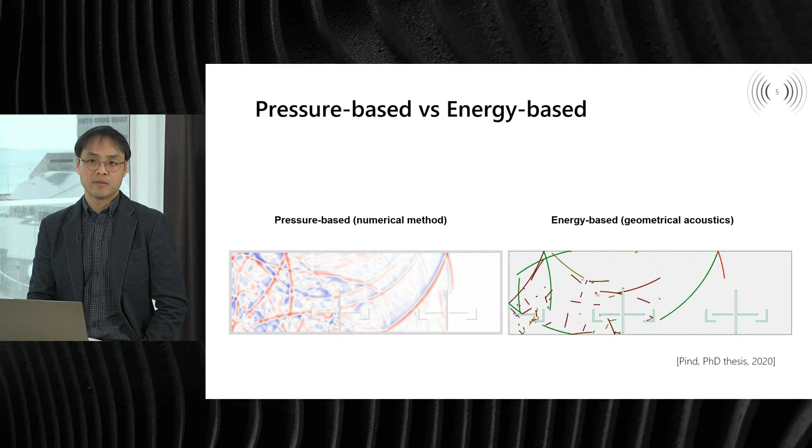I want to talk about pressure-based and energy-based simulation in this talk. Basically, pressure-based simulations are predicting sound pressures, and many of the numerical methods, all the wave-based simulations, are pressure-based — we calculate the pressures. On the other hand, many geometrical acoustics techniques are energy-based.

Of course, there are some pressure-based geometrical acoustics techniques. On the left you see the sound propagation from a source, and there are two different colors, red and blue. Red means sound pressure is positive, and blue means sound pressure is negative. So we have kind of phase information in this kind of pressure-based simulation, and the sound is all over at any time.

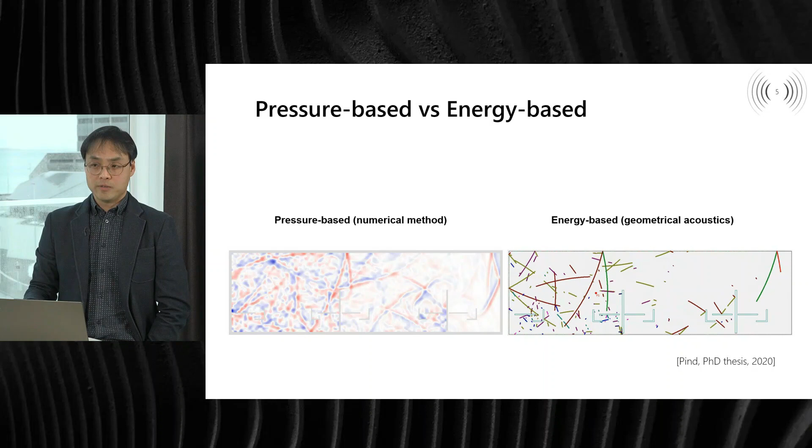If you look at the picture of the energy-based simulation, we have an approximate wavefront, but the wavefront is not continuous — it's a very discontinuous wavefront and sound field, and we don't have phase information in this kind of simulation. So what is lacking in energy-based simulation are diffraction and interference. I will go into those things a little later.

Geometrical acoustics has really many good features. I mean, it's really fast, and it actually calculates the angle of incidence, and it also visualizes the sound path very nicely with straight rays, as in this picture.

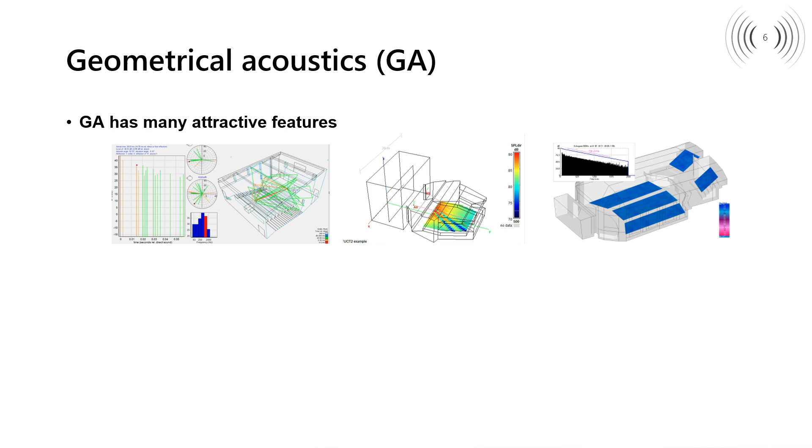But it is only the particle property of sound. As Einstein mentioned, we have two contradictory pictures of reality. Separately, neither of them fully explain the phenomena, but together they do. So we want to combine the wave nature and the particle property of sound in acoustic simulation, because they complement each other.

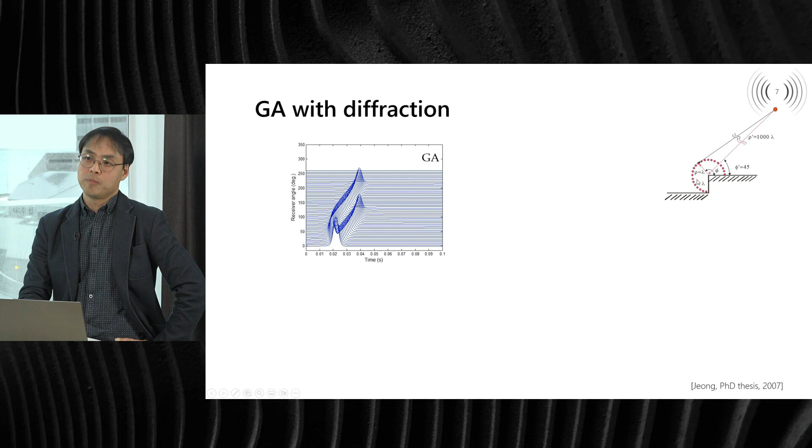So, diffraction. This is a very simple setup, a geometrical acoustic simulation. We have a sound source far away from this structure, and these are the receiver positions, at different angles. From this angle to this angle, we have direct sound and reflections.

You could actually see two different pulses: this one indicating direct sound, these are reflections. From this angle to somewhere here, you have only the direct sound. And above this angle, there's no sound using geometrical acoustics.

So we have a very discontinuous sound field, indicating the impulse response from all the angles. By adding single diffraction and double diffraction, and summing geometrical acoustics with those two diffraction components, we make the sound field very smooth and continuous. This is the true picture, more realistic in our life.

So there is a way to add the diffraction component into the geometrical acoustic simulation. There's actually a better way: when we numerically solve the wave equation, we inherently have diffraction in the solution.

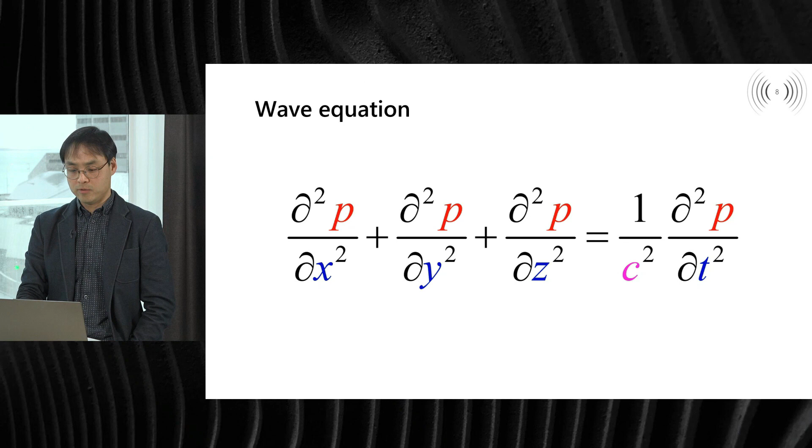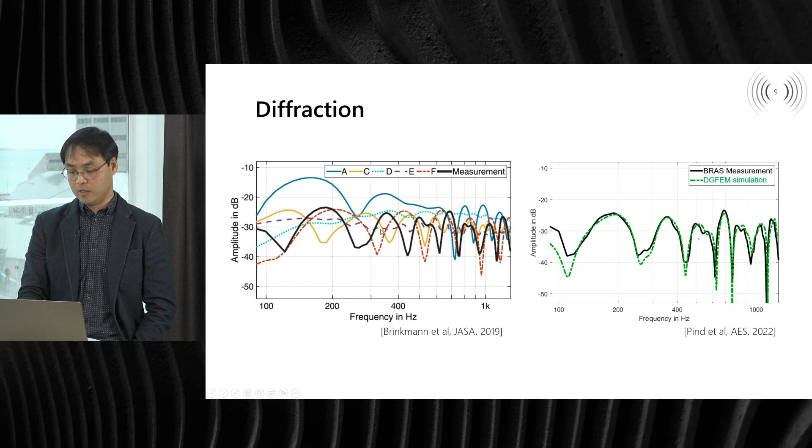Those German researchers from TU Berlin and TU Aachen also made a round-robin test, comparing commercial geometrical acoustic simulations A, C, D, E, F against the measurement. Those geometrical acoustic simulations struggle to match the measurement because they are energy-based simulations.

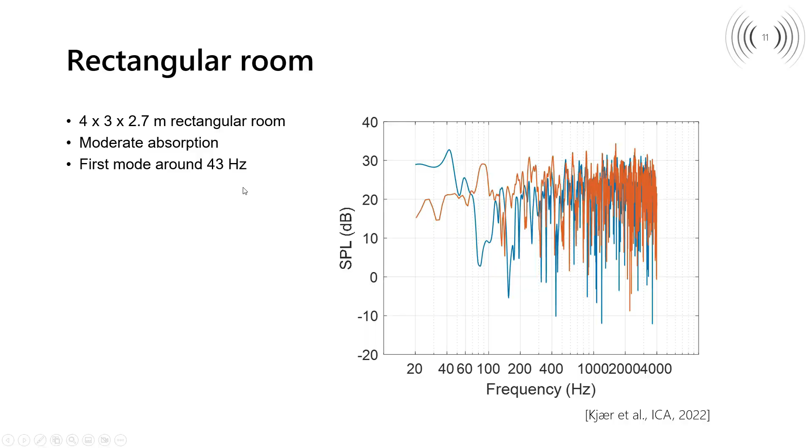We made a comparison between two different simulations: one pressure-based, the other geometrical acoustic. This is a rectangular room with dimensions of 4 by 3 by 2.7 meters. The first room mode must appear around 43 Hertz. In one simulation, you could see that peak; in the other simulation, you cannot really see any peaks around 43 Hertz.

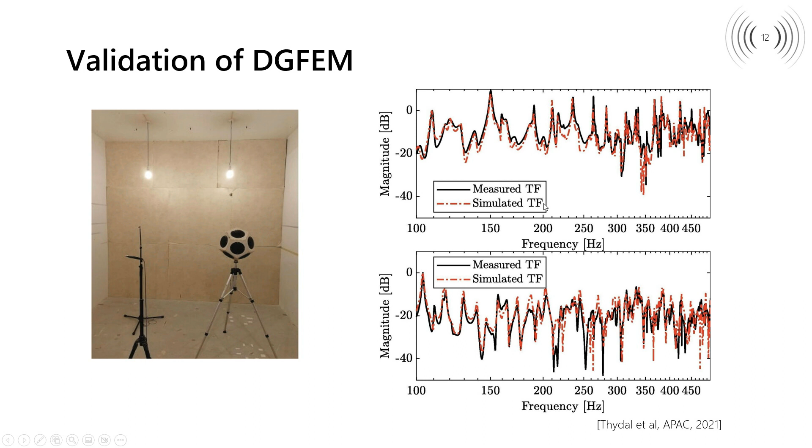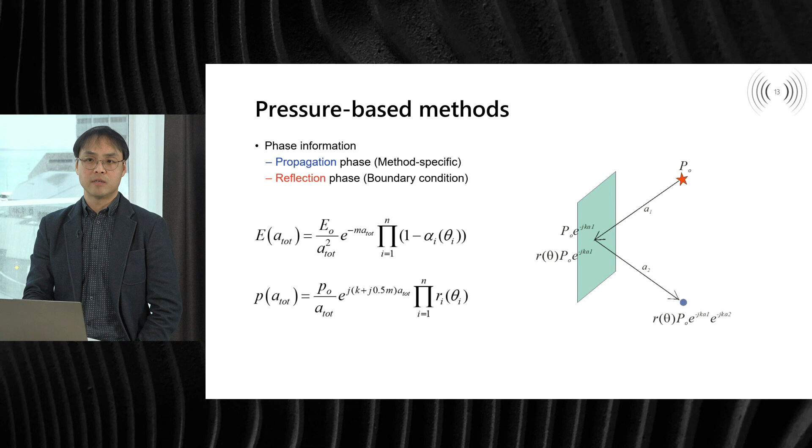As sound propagates, we have phase information, and some methods can take this into account, for example numerical simulations or wave-based simulations. The second phase information is reflection phase: we have a phase shift on the boundary upon reflection. If we inject a nice phased boundary condition, we could take reflection phase into the simulation.

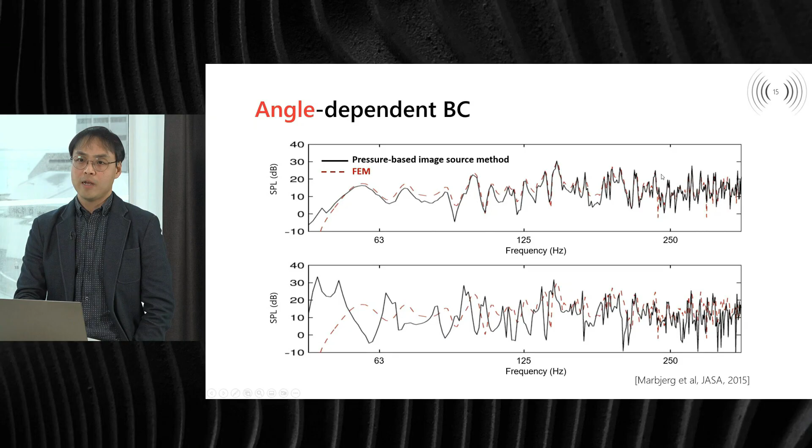Let's move on to the boundary condition. In this slide I'm showing two graphs. The black line is the pressure-based image source method, and the red dotted line is the finite element simulation, which is basically the same in both graphs. So what makes the pressure-based image source method so different between the two? That's the boundary condition—we used different boundary conditions.

On the top one, we use the angle-dependent, complex-valued pressure reflection coefficient, which has angular dependency and phase information inside. When we use random incidence absorption coefficient—an angle-averaged absorption coefficient—it doesn't have any angular dependency or phase information. That actually messed up the simulation quite a bit.

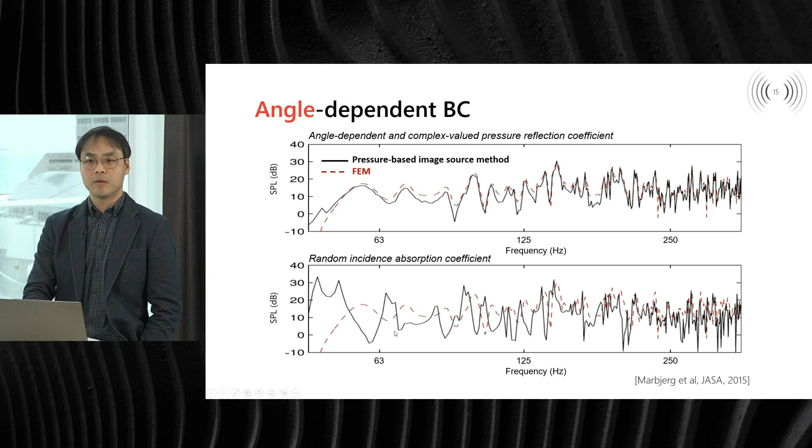So more precise input data is always good, of course. Let's move on to this more difficult topic, extended reacting boundary condition. Extended reacting effectively means that the surface impedance changes with the angle of incidence.

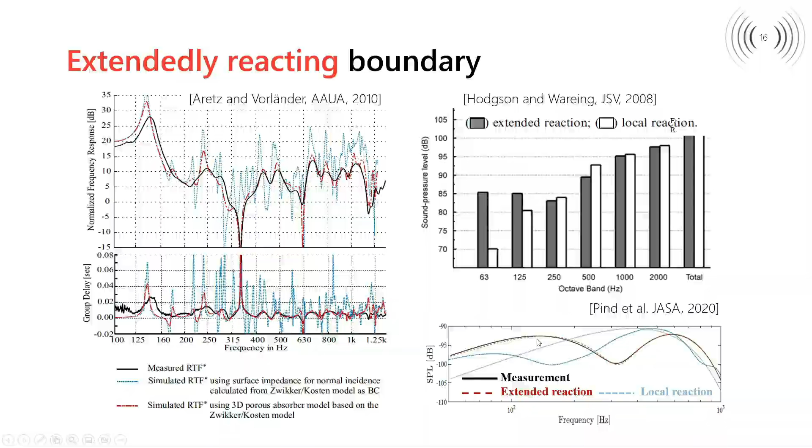So my message is we have to use pressure-based methods and more precise boundary conditions—whether pressure-based reflection coefficient, surface impedance, or angle-dependent complex reflection coefficient. Then we can include all the phase information in the simulation. In contrast, energy-based simulation with a less precise boundary condition, like the sound absorption coefficient, has no phase information.

This is actually one of the conclusions from the round-robin test paper in JASA: most geometrical acoustics methods generate obvious modeling errors, due to the simplified use of random incidence absorption coefficient and scattering coefficient. So the quality of the boundary condition really matters, and these geometrical acoustic simulations are missing or insufficiently modeling diffraction since it's simply energy-based simulation. It's very clear we have to use more pressure-based methods and good boundary conditions.

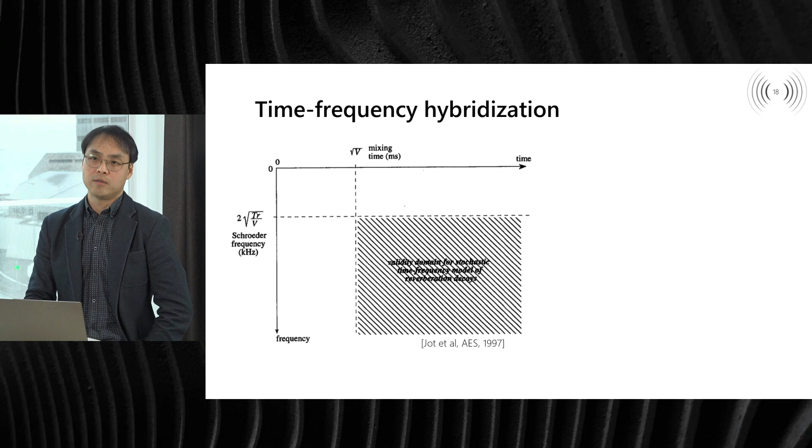Let's talk briefly about hybridization. We have tons of simulation tools, so why not hybridize the simulation in time and frequency? This plot shows the valid range for a stochastic time-frequency model of reverberation decay above the mixing time, above the Schroeder frequency—which is one of the transition frequencies from low frequency to high frequency.

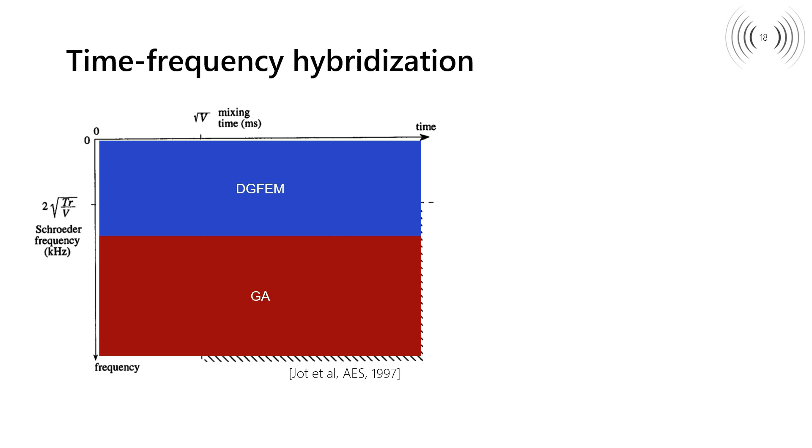So it's pretty wise to combine numerical wave-based simulation like DGFEM at low frequencies and use geometrical acoustics at high frequencies, since geometrical acoustics is much faster than DGFEM. Actually, Treble combined the pressure-based ISM in the geometrical acoustic part, extending the accuracy somewhat. But it's always a compromise.

If you really want a fast simulation, the geometrical acoustics part must be bigger than the DGFEM part. If you really push for accuracy, then DGFEM could be used up to 2 kHz, 4 kHz, very high frequencies.

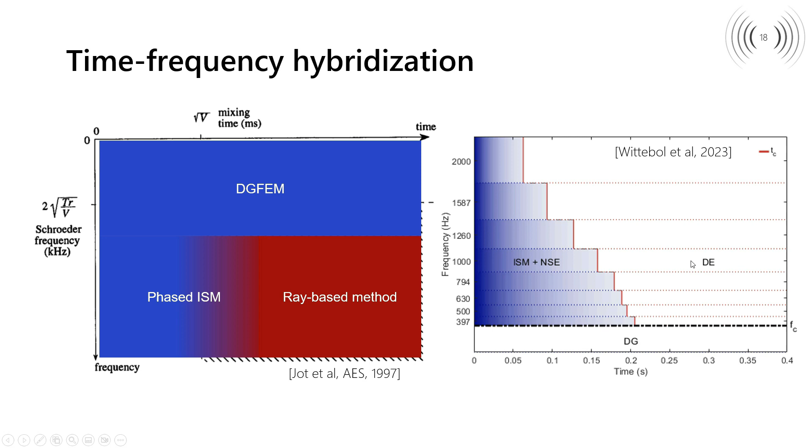I know there's a similar PhD project in Eindhoven Technical University by Treble and Maarten Hornikx, where they're developing a simulation tool combining DGFEM simulation, ISM in the early part of the high frequency, and the diffusion equation at the late part of the high frequencies.

Okay, assume we have very good, very fast, very accurate simulation. What kind of opportunity do we have as acousticians? So we actually don't simulate that many buildings in the design phase, only the very important rooms or music halls. That's actually less than 5% of the buildings we build these days.

By using accurate and fast simulation, we could increase the amount of buildings simulated in the design phase. For example, multipurpose halls, schools, conference halls, or offices we use every day, so they are very important. And restaurants, for example—there are some restaurants with horrible acoustics, and hospital sound is not really great—we could improve the acoustic conditions of those places.

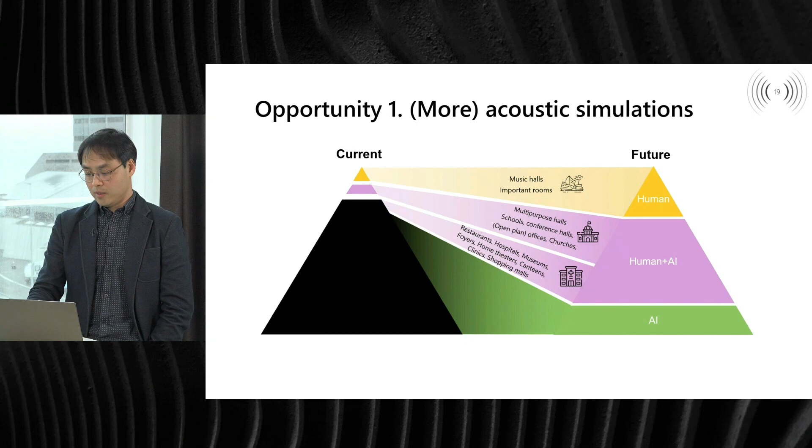Maybe we could also use AI systems to label that this acoustics is okay and this acoustics is not okay. This is important because many architects draw something and send it to an acoustician, and they have to wait 2 days, 3 days, or a week to get it confirmed. So the workflow is not great, but once the workflow is really good—I know Treble is focusing on this aspect of seamless workflow between different people—to enable a better sounding world.

So the beauty of simulation is that we could do some missing data imputation. Maybe you've heard this survivorship bias story. During World War II, American statisticians looked at the damaged parts of aircraft, and they realized that 26 engine-damaged aircraft returned to the base, and 105 fuselage-damaged aircraft returned to the base, or something like that. We don't actually know how many were damaged and how many didn't return to the base.

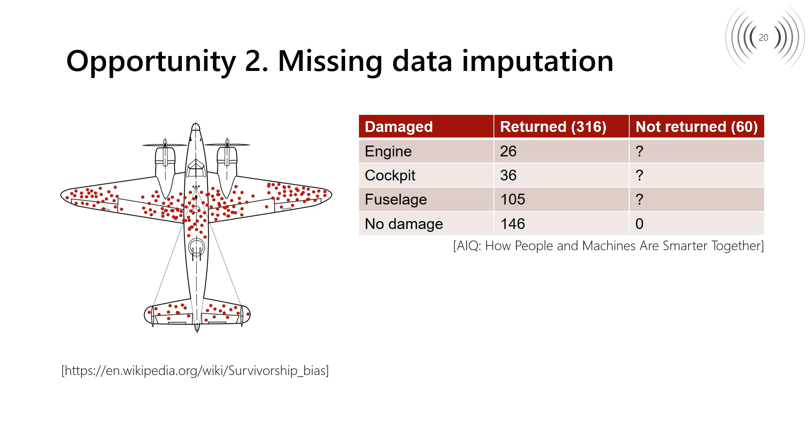So due to this missing data, people were a little confused. But thanks to simulation, they could recreate this kind of data. So the power of simulation is to generate missing data and do missing data imputation like this. Then it's very clear what the chance of returning is with engine damage. If you look at those numbers, the chance of an engine-damaged aircraft returning is less than 50%. So of course we have to reinforce those parts, not the fuselage. With complete data, we could answer more meaningful questions, and that's the power of simulation.

And the same applies in acoustics. For example, we might be curious: what if we change the ceiling? What if we change the window? How does the noise and acoustics change? We could do all this kind of simulation without making any physical changes.

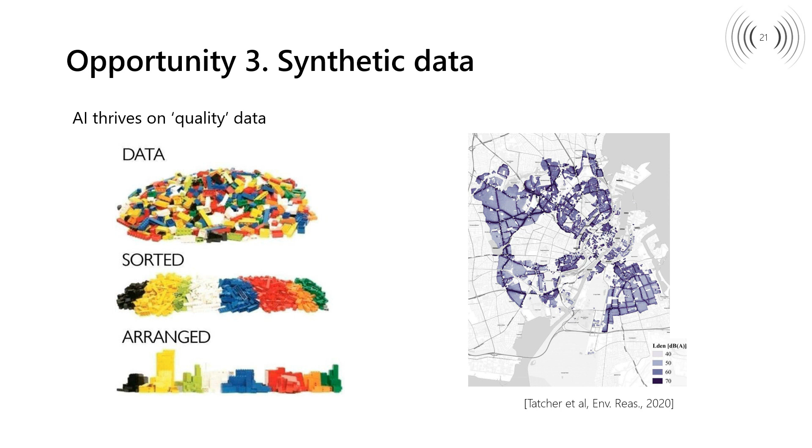Opportunity number 3: synthetic data. We are living in the era of AI, and AI requires a lot of quality data. We know that by doing a lot of measurement, we could get real-world quality data, but it's very labor-intensive—it takes months or weeks. But using simulation, we could generate quality data in a day or two.

Acousticians already knew that, because when making noise maps like this in big cities in the EU, they only use simulations. They never send people out to do measurements for 24 hours, 365 days—that's impossible. So we purely rely on numerical acoustic simulation for those kinds of noise maps.

Opportunity number 4: we need sound simulation for multimodal perception. Sound is an important part of multimodal perception, so we need an accurate and fast simulation of acoustic space to do this multimodal perception evaluation.

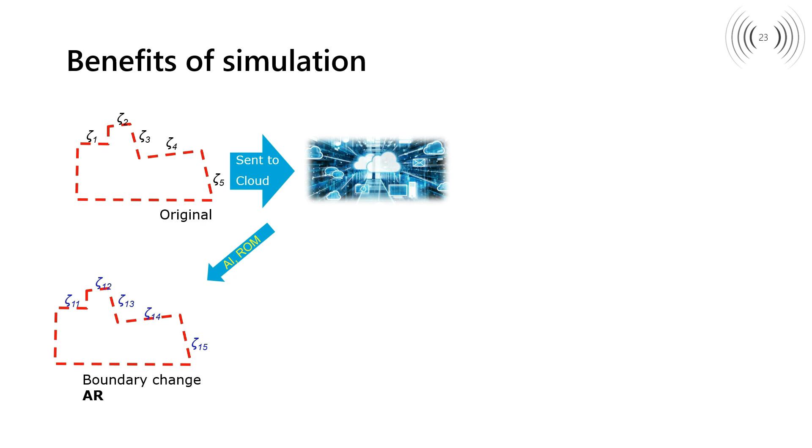Okay, this is the second-to-last slide, and you can see the benefit of simulation as a summary. Once we have an original model and send it to a fast computer or cloud, and we change the boundary condition, that's basically AR. So if a company claims they made a window which can reduce traffic noise levels by 20 decibels, you basically render the space, change the boundary condition of that window, then run the simulation to get the acoustic condition or noise data.

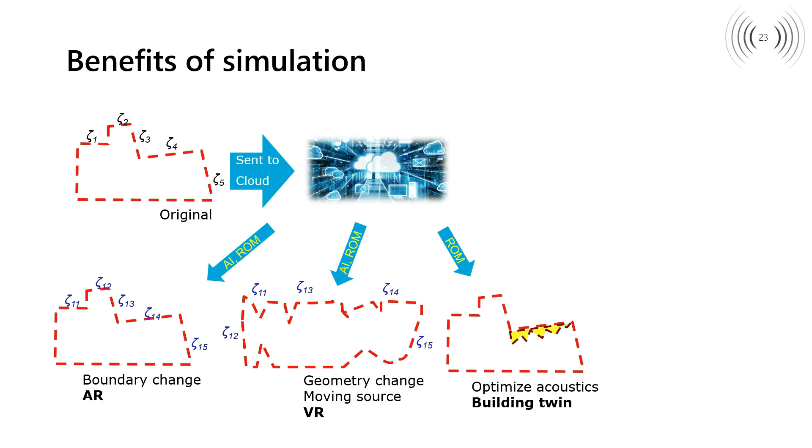And you could actually hear the sound through headphones, comparing those AR, augmented reality conditions. We could do VR by changing the room geometry and the moving source, and optimize the acoustics using simulations. We could also do speech enhancement using this kind of room simulation—for smart speakers or normal speakers like this one, or for the automotive industry, like cars.

And also hearing aid companies can benefit from room acoustic simulation. Acoustic forensics or accident detection can also be done through a lot of simulation, making surrogate models of accident detection. So simulation has really big potential in generating synthetic data for machine learning.

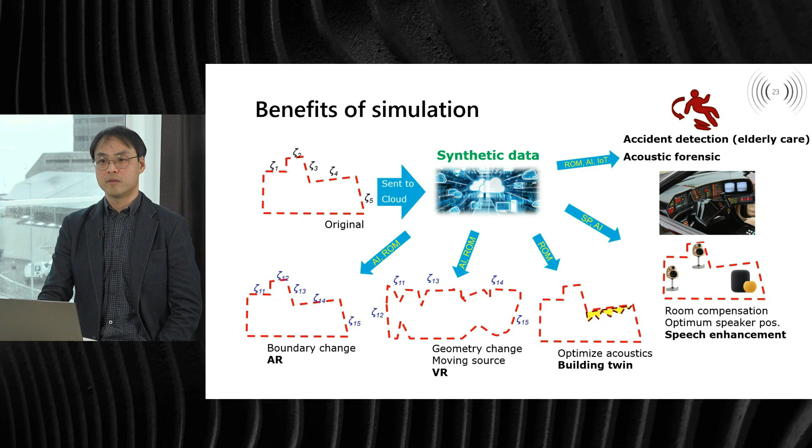So here's my conclusion. I think we need more pressure data than traditional energy parameters, and always keep in mind the accuracy and speed. We need accurate and fast simulation.

By having accurate and fast simulation, we could make digital models of buildings, urban streets, robots, or vehicles, many different applications. And we could generate a lot of synthetic data in a very short time for machine learning and AI studies, and we could make sound simulation, sound stimuli for multimodal perception evaluation. Yeah, that's it, and thank you for listening.

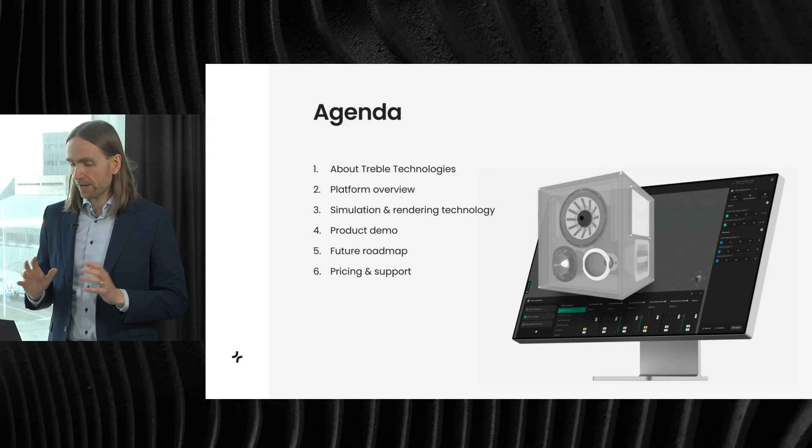Here is the outline of my talk. I will first give a brief overview of our company, Treble Technologies, and then a high-level overview of the platform that we are launching today. After that, I'll dive a little bit under the hood and show you some of the details of the simulation and rendering technology that powers the platform. After this, I will switch gears, turn off the PowerPoint, and go over to the product demo and show you the platform and showcase its capabilities. Then after the demo, go back to the PowerPoint and very quickly talk about what lies ahead for Treble and a few words on pricing and support.

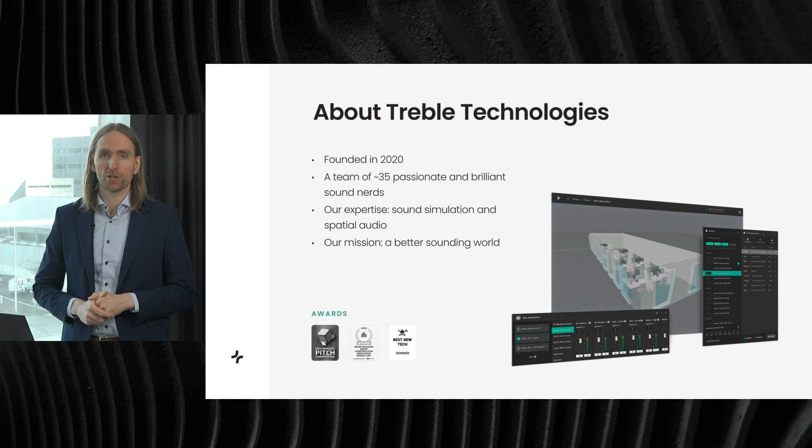Treble Technologies is a startup that was founded in the summer of 2020, but our roots go back some years before that into academic research, mostly at DTU in Copenhagen. In 2020, we were just 4 guys, but now we are around 35 people, lots of passionate and brilliant sound nerds, and there is just so much momentum and fun at Treble these days, lots of fast developments going on. Our expertise is sound simulation and spatial audio, and our mission is to develop technology to make the world a better sounding place.

We are based in Reykjavik, Iceland. The weather today in Reykjavik is pretty good actually, and there's sort of a hint of spring in the air, which is exciting.

Okay, but Treble, the platform. We typically speak about Treble as a platform of virtual sound, meaning it's a software package that has functionality relating to sound simulation on the one hand, which is this concept of simulating how sound propagates in a 3D model. And then on the other hand, sound rendering, which is the idea of not just getting graphs and numbers from the simulation, but rendering the simulation for listening, so we can experience how the thing we're designing will sound before it's built.

When we started our company, we were exclusively thinking about the building industry. We wanted to develop a software package that enables engineers, consultants, architects, and others in the building industry to efficiently and precisely design and simulate acoustics as a part of building design. This absolutely remains a key focus for us, and the platform we are launching today is perhaps most tailored towards this use case. But after we started, we also realized that having the ability to simulate sound in a fast and precise manner has use cases beyond the building industry.

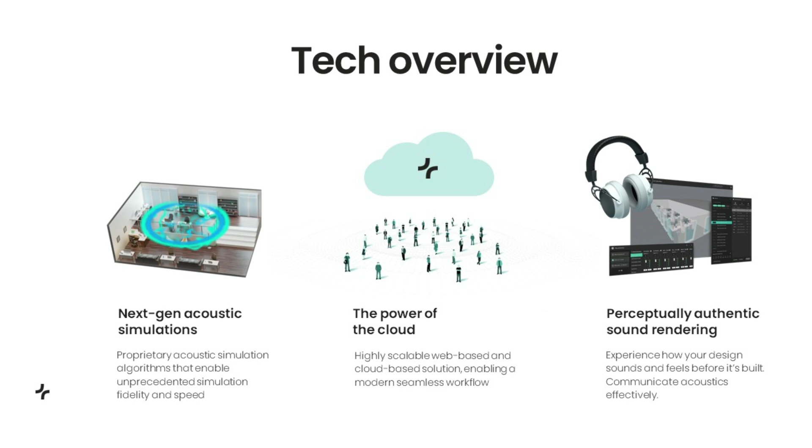What we are trying to bring to the table with this new platform is summarized here in this slide. It's three things. First of all, which is perhaps the core of it all, new technology to simulate sound in a faster and more precise way than what's been previously possible. Second, a very strong emphasis on a modern, seamless workflow that is powered by the cloud. And third, last but not least, the idea of not just getting out graphs and numbers from the simulation, but being able to listen and experience the simulation in an audiovisual experience.

Then the simulations themselves run in the cloud. Once they're done running, results come back to the web app where users can view the results, analyze them, look at graphs and numbers and things like that, but also listen and experience the simulation.

We then have a live link connection over to SketchUp via our plugin, which enables a very seamless workflow and a seamless iterative design process between the 3D modeling tool and the simulation tool. I will demo this in a second.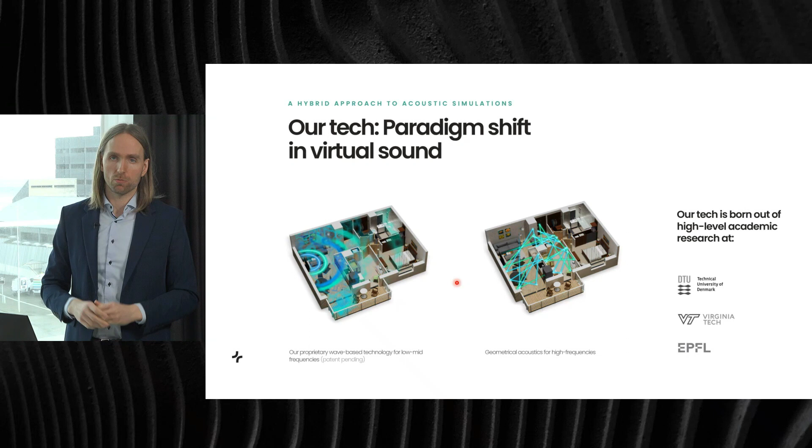This is what we set out to address, and we're extremely proud to introduce our wave-based simulation engine, which is more than 100 times faster than what current state-of-the-art solutions on the market can offer.

This means that now we can simulate a good portion of the spectrum wave-based. Smaller rooms, we can even simulate the full spectrum. In larger rooms, the relevant frequency range where wave phenomena is most prominent, and have the runtime just be a handful of minutes.

A few more details about the wave-based solver. It is a discontinuous Galerkin finite element method formulation in the time domain. The benefit of this numerical method is that it has very high geometric flexibility, meaning we can easily simulate complex geometries such as curved surfaces or fine geometric details.

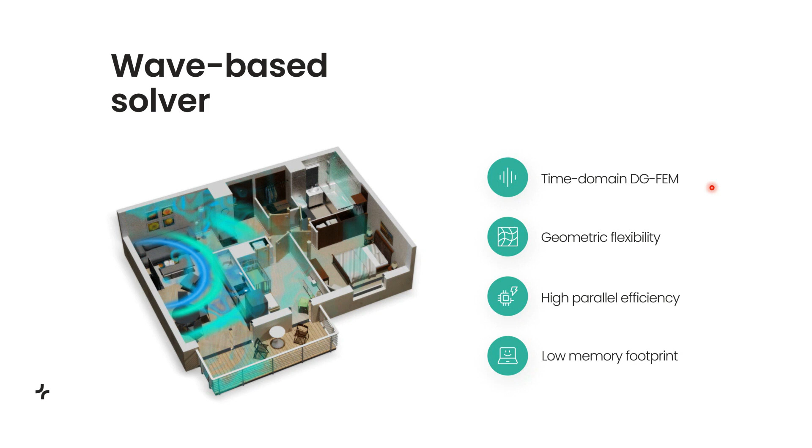Then it has a very high parallel efficiency, which is a key component in what's enabling us to really accelerate these simulations so much. Third, last but not least, a very low memory footprint, which means we can easily handle very big simulations.

We're also extremely proud of our geometrical acoustic solver, which introduces new technology for high-frequency sound simulation. Our approach is a phased image source method / ray radiosity hybrid approach, which means we can capture the phase of the simulation. We model boundaries with the phase shift included, and it's a pressure-based approach. So we actually capture the high-frequency acoustics very well, as we saw some examples from Cheol-Ho's presentation this morning.

We also do angle-dependent absorption modeling, which improves accuracy at high frequencies, and state-of-the-art scattering modeling too.

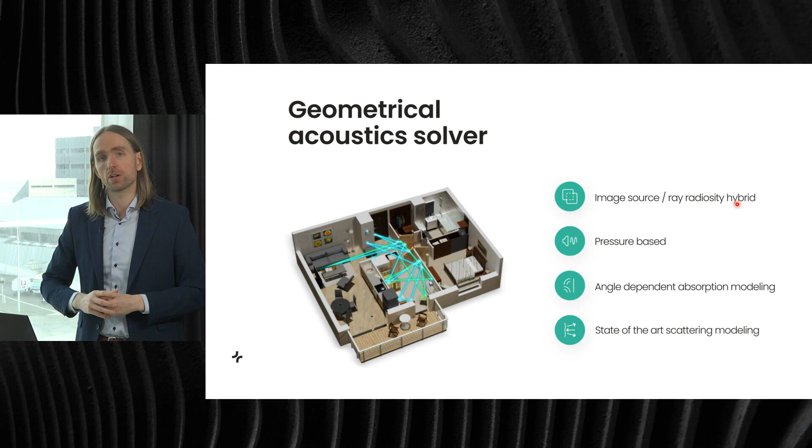Now, as probably most of us here today know, the materials or surface conditions of 3D models of spaces we want to simulate the acoustics of have a huge impact on the resulting acoustics. Actually, some research has shown that what people perceive to be the weakest link in acoustic simulations today is the uncertainty relating to material modeling.

So we have put in considerable effort to improve people's ability to model sound interaction with surfaces, sound absorption. What we're introducing is the idea of modeling surfaces not just in terms of energy absorption coefficient, but modeling it via the impedance, which means we capture both energy absorption and the phase shift. We have carefully crafted a large database of materials with detailed impedances for all those different common material types which come with the tool.

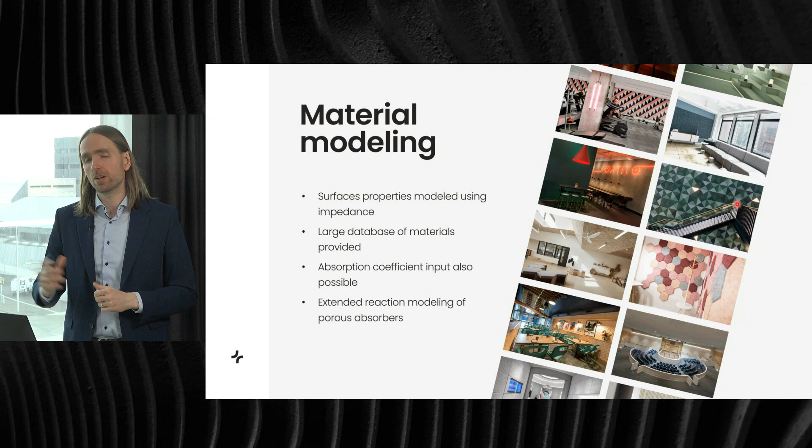We also support traditional absorption coefficient input if you want to add a new material to the database, for example, where you have a data sheet with some absorption coefficients. We have an elaborate algorithm underneath which converts those absorption coefficients to surface impedance.

We're also introducing the ability to model the extended reaction of porous materials. Porous materials are the most common sound absorber you'll find in rooms. By modeling the extended reaction, which is the angular dependence of the surface impedance, we get a much more precise simulation when those materials are in play.

We also have powerful capabilities for modeling sound sources, enabling both omnidirectional and directional sound sources like speech or human voice and loudspeakers. Our library of sound sources is growing fast and will continue growing very fast over the coming few months.

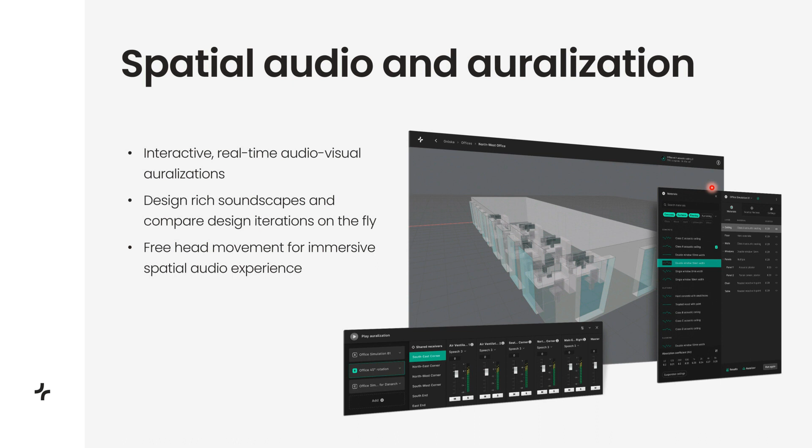When it comes to auralization, we simulate high-order spatial impulse responses in our simulation, and then use those to generate audiovisual auralizations. These auralizations are interactive, meaning you can move your head and the spatial audio updates in real time. You can jump between different positions in the space.

You can compare different simulations and different material configurations on the fly. This enables you to design soundscapes and assess different design options in a very intuitive way. It also means you can communicate acoustics design very effectively to clients and stakeholders.

As I mentioned, our platform is entirely cloud-based and web-based. This comes with a lot of benefits. First, it's a key component enabling us to accelerate these simulations and enabling large-scale wave-based simulations. Secondly, it allows us to do virtually unlimited simultaneous simulations—you can set up a simulation, fire it off, and immediately start another, even running hundreds or thousands in parallel.

For example, for a parameter sweep or for generating data where you want to simulate a lot of rooms in parallel. The platform has zero hardware and software footprint, meaning your computer isn't strained when you run a simulation, and you don't have to install any software to work with the platform.

And then all kinds of nice features such as collaboration features, working with colleagues within your organization or across organizations, your history being backed up so you don't have to worry about losing old simulations, and world-class security just like your online bank.

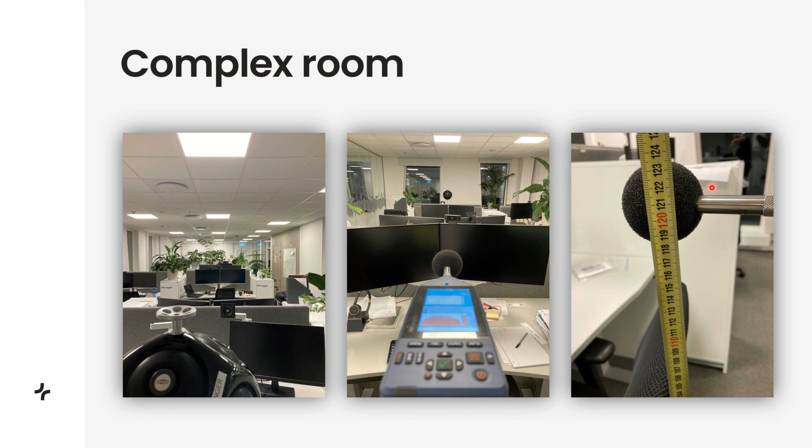This was done in collaboration with COWI, an engineering consulting firm, where they analyzed the acoustics of this typical open plan office. They carried out extensive measurements in the space and then used a beta version of the Treble platform to simulate it and compared the results.

What they found was that the reverberation time of the room was very well predicted with the Treble simulation tool, the wave-based part of it, which covers the low to mid frequencies, whereas a standard geometrical acoustics tool could not predict the true reverberation characteristics of the space.

Okay, I will now switch gears and pop open the tool and let's take a look at how it's looking. Okay, so let's refresh this one.

So to open the Treble platform, I go to app.treble.tech. First I have to log in—I've already logged in. What I'm faced with here is an overview of the different projects I've been working on. A project can, for example, be a school, and then a school building will have different spaces within the building for which I'm designing the acoustics.

So for example, a particular classroom, another classroom, a meeting room within that school—same for a hospital or office building or whatever. Today I'm going to play around with this model here, this space, which is part of this office building project. I go into the space, and then I'm faced with different revisions of the 3D model geometry that I've been working with.

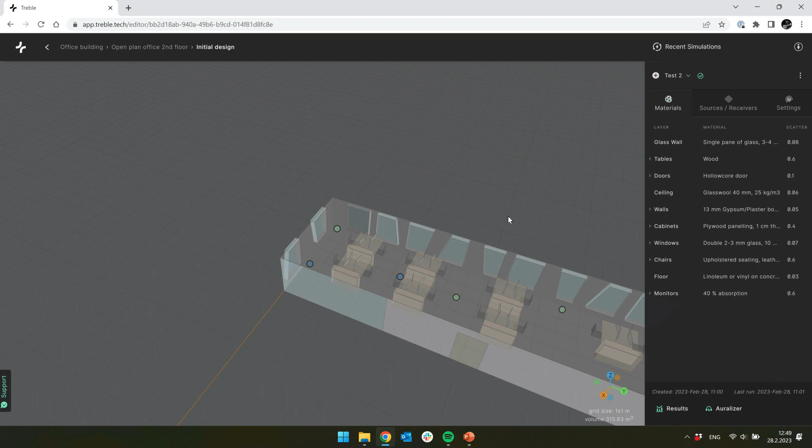So I will open one I've already uploaded, called the initial design. I gave it that name, and then I open it and go into what we typically call the editor. In the editor, you can view the 3D model, move it around, and then set up your simulations and run them from here.

So let's create a new simulation, and I'll call it initial material configuration, something like this. The first thing I have to do is assign materials on the different surfaces in the space. When I prepared my 3D model, I divided some surfaces onto different layers to facilitate the material assignment later. I can assign materials on an entire layer or on a surface within a layer if I want.

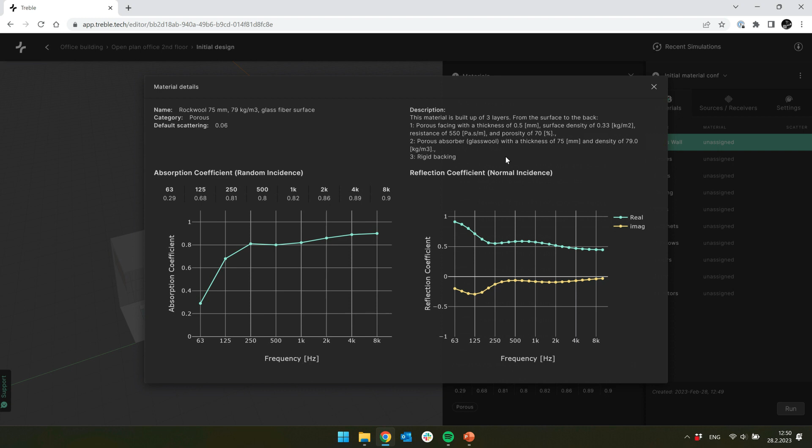Let's open up the material library. It's a very extensive library that we've carefully crafted with impedance information and everything. If I open up a particular material, maybe this one, I can see the detail view with the absorption characteristics, but also the complex reflection coefficient, which is related to the complex surface impedance. I also have some details about how this material was crafted.

I can also create my own materials here, where I input absorption coefficients and give it a category. The category plus the absorption coefficients is used by the algorithm I mentioned earlier to convert the absorption coefficients into a physically plausible surface impedance.

All right, let's try to assign some materials here. Let's start with a glass wall — that's a window material, so I'll put a single pane of glass on it. I also have a layer called windows, the outer windows, and I'll put a double layer glass on that one.

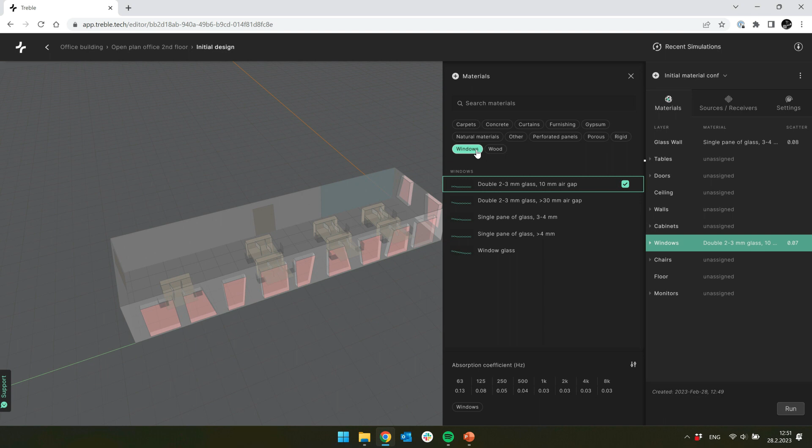Then let's move to the tables, maybe in the furnishing or wood categories — I have a material called wood, let's put that on. Doors, maybe this hollow core door material. Chairs, how about leather-covered upholstered chair material on the different chairs. And cabinets, maybe plywood paneling, 1 centimeter thick. I think that's it for these two categories.

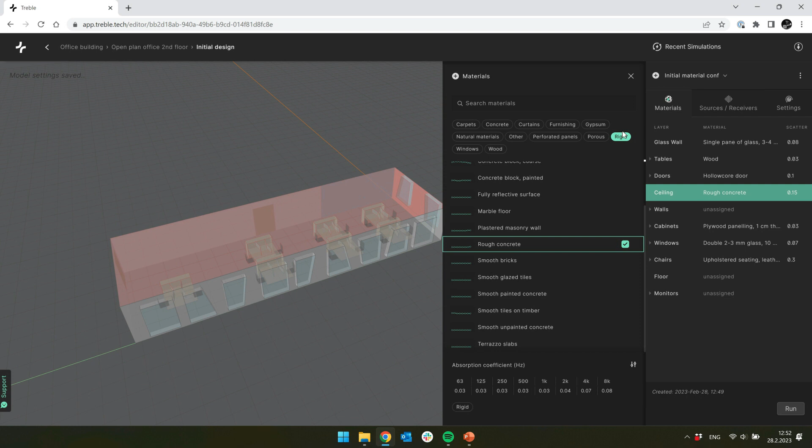For the ceiling, let's start with the hard ceiling, so no limited acoustic treatment in this space — let's say rough concrete here. The walls, maybe gypsum boards, something like this. The floor, let's use the search function, put linoleum on the floor. And the monitors, how about we say they're 40% absorbing, frequency independent, as we see here.

All right, next step is assigning scattering coefficients. These are only used by the geometrical high frequency solver, as an indication of surface roughness. The tool proposes some scattering coefficients based on the material selected. In some cases that's fine, but in others you might want to modify them. I'll modify a bit here, maybe up to 0.6. Let's say the cabinets are also a bit more diffusive, tables as well, something like this.

All right, now the materials are set. Next step is to set sound sources and receivers. So I will put a sound source in here, let's give it a name — cool source — and let's move it around, dragging it all the way over here. This is our first sound source.

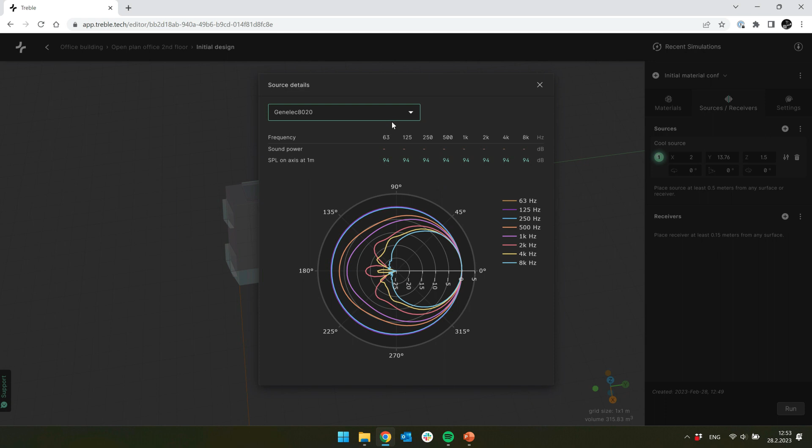I can open the detail view of the sources, where I can select directional sound sources too, such as speech or a given loudspeaker. As mentioned, we are growing our library of sound sources as we speak. But for this test today, let's just use an omnidirectional sound source.

Okay, let's add a couple more sources as well — maybe one in the corner here and one somewhere in the middle of the space, something like this. And then let's add a few receivers: maybe the first one here all the way in the corner, the second one over here — or let's have that one sitting by this desk, should we put it a bit down, something like this.

And the third one in the corner, something like that. Okay, materials, sources, and receivers are set.

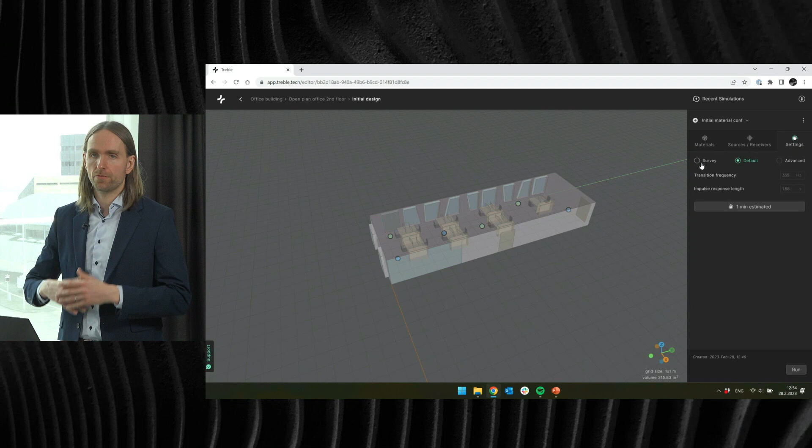Last thing to look into is the solver settings themselves. We have three presets here. A survey simulation is a fast but less precise simulation. Default, then the tool tries to propose a reasonable transition frequency from the wave simulation over to the geometrical acoustic simulation, taking into account the geometry and the materials you've selected.

And then we also do have advanced settings here, where we can freely control how high in frequency we want to go with the wave solver, and some other settings as well. But I think we should just use the default setting here today. It's saying it's taking around a minute to simulate.

So I hit the run button here, and I start the simulation. Starting the simulation takes a few seconds. It's spinning up a machine in the cloud, provisioning resources, reading in the geometry data and putting it on all the GPUs that are running the simulations and so on.

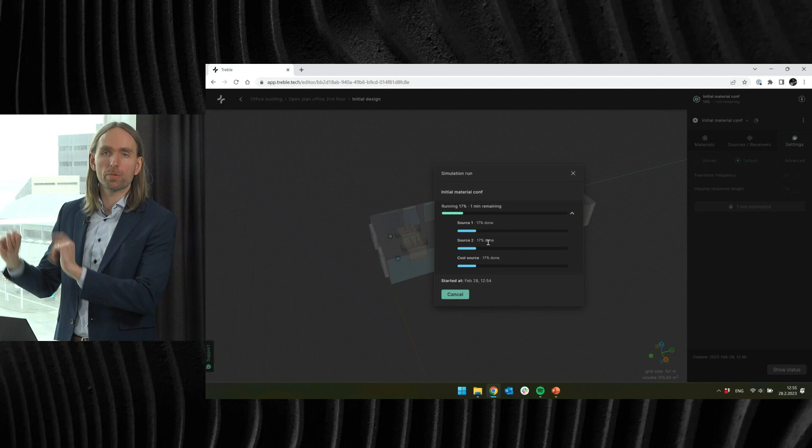So this takes just a few seconds, and once that has begun, we can see the simulation starting to progress. Note here, I forgot to put names on the other two sources, so we have cool source and source 1 and 2. That's fine. We'll see progress of the three different sources, because each source is actually a separate simulation, but the user doesn't really feel that — you don't have to run them sequentially, they just run in parallel on the cloud. And now we see that this has started.

Another thing that's very neat is that because this is cloud-based, it's not running on my computer, so I can just close this thing and immediately start setting up my next simulation. And I can duplicate the settings of my previous simulation, so use that as a starting point for setting up my next simulation.

Let's say here, improved material configuration, some absorption in the ceiling. Something like this. Now I have everything that I previously set up ready to go here. I'm just going to change the material in the ceiling. Let's put some glass wool into the ceiling, maybe 40 millimeter thick glass wool, a rather commonly employed acoustic treatment, which has some absorption, particularly in the higher frequency range.

I don't need to do anything else. Now it's suggesting that I simulate a bit shorter than before, because the space is a bit less reverberant, probably because there's more absorption. But I just hit the run button and I'm ready to go.

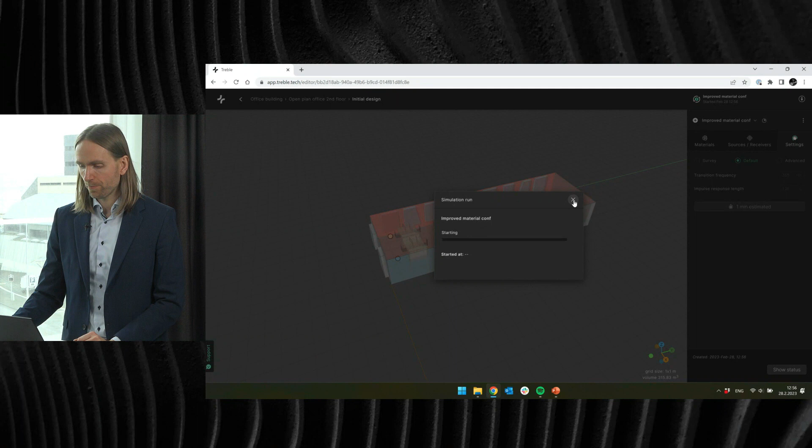And now the two simulations are running in parallel. I can see the progress of all running simulations here in the overview — all the recent simulations I have run and the status of current running simulations. And now it's telling me the first simulation is actually done.

I want to show you the results of the two simulations together. So while we wait for the second simulation, I can show you a couple of things here.

Let's go back to the first simulation. For example, in the advanced settings here — I'm editing the simulation so it's giving me a warning — I can test how long the simulation will take as a function of how high in frequency I go. So let's just take a look at that for a 1 second impulse response. For low frequency simulation, it's around a minute that it's suggesting here. But if we go higher in frequency, the runtime increases, of course, and even higher to around 45 minutes for this particular space. But we can easily cover the low to mid frequency range in practical runtimes with the tool here.

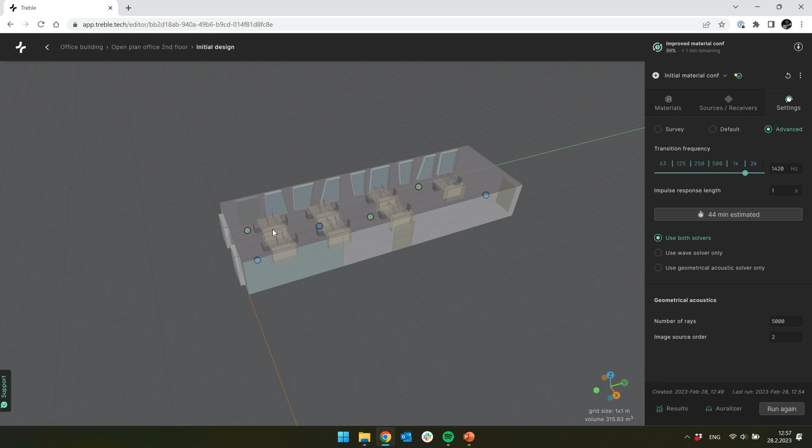Second thing I can show while we wait is a support portal here. If we have some issue or need some support, we can just open the tool here, send us a message, and you will get a response and help very quickly.

Okay, now we can see the simulation is just about to finish the second one. I'm going to revert back so I didn't modify any settings of the first simulation, and we can start looking at results.

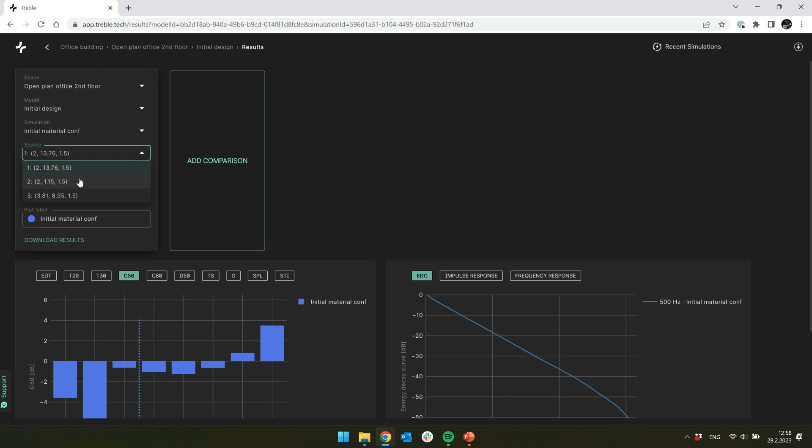I enter here the results view, and what I'm faced with is two charts essentially. On the left here we see all kinds of acoustic parameters that we can analyze in the space. I can of course select different sources and receivers and so on and see how this varies.

We have reverberation time, early decay time, clarity, definition, center time, amplification or strength, sound pressure level, speech intelligibility as a function of the background noise level in the room, and so on. I can also look at the impulse response of the room and the narrow band frequency response, which is very precisely simulated here at low frequencies, meaning we can analyze the modal behavior of the space too.

Another thing I think is quite neat is that we can compare simulation results. So let's take these two simulations that I've now run and compare the results from them.

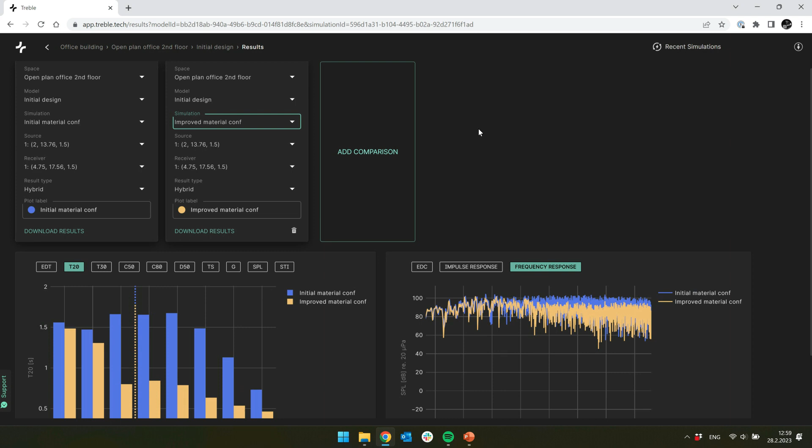With the improved material configuration, the reverberation time in the room decreases and the acoustics are improved. We'll also see this in, for example, different energy decay curves and so on. The energy is decaying faster in the room when we have better or more absorbing materials.

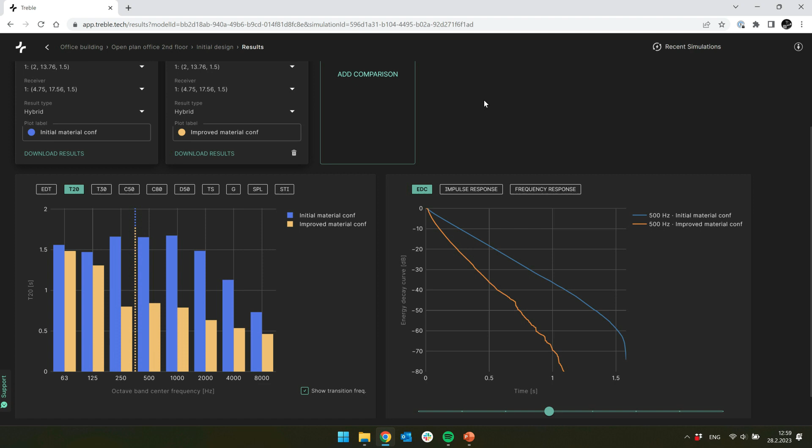I can hit the download results button, which downloads all the spatial impulse responses and an Excel sheet with all these parameters and so on. This is sort of the graphs and numbers part of the results, which is very useful and interesting. But what's not less fun is to actually just listen.

So I go into what we call the auralizer. Here I'm faced with a tool where I can create a sort of soundscape in the model, and I can experience it and compare things on the fly. So here I have the three sound sources I put into the simulation. I can select sounds from our very extensive list of anechoic sounds to play from the different sound sources, and I can pull in different simulations I've run to do an A/B comparison on the fly, jump between receiver positions and so on.

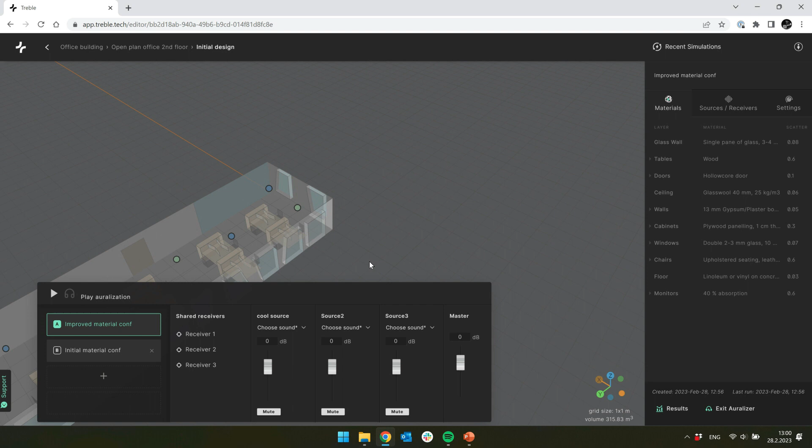I'm just going to demo it a little bit now, let's listen and enjoy. I'll start with a drum loop sound—it's nice because it's so percussive, so you can really hear the acoustics of the space pretty well. First I'll play the anechoic sound, then I'll jump into the room and move around and change things on the fly.

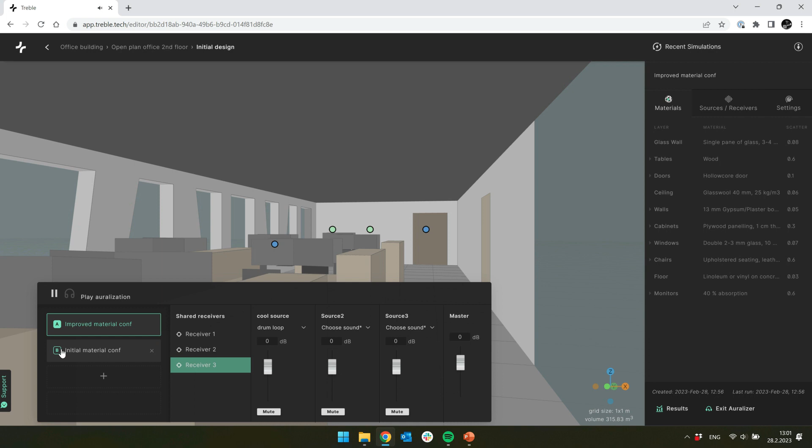Okay, I now go into the room. I'm moving the head, and the spatial audio is updating in real time. I'm jumping between different positions, and I can compare the different simulations, the different material configurations. Clearly it's more reverberant in this initial material configuration.

Let's try putting in more reasonable sounds than just a drum loop—let's create like an office soundscape. I'll put some office atmospheric sounds here, some office chatter as well, maybe some classroom background too. That's kind of similar, I'll play that here. Increase that a little bit—I can adjust these things on the fly.

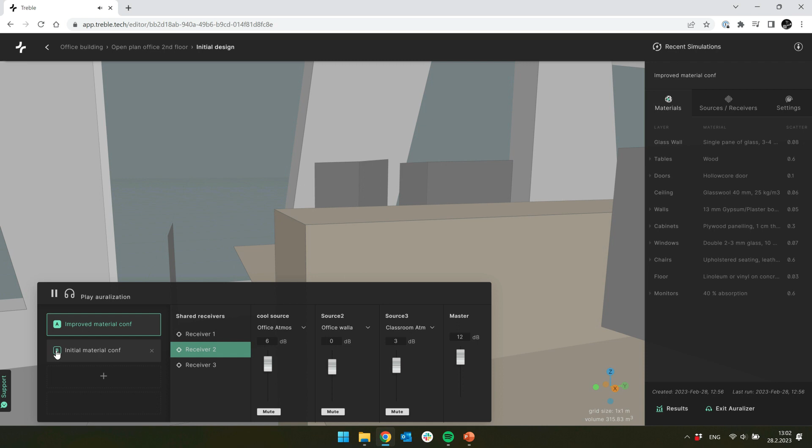Maybe put the atmos sounds a bit higher. Coffee machines going, and so on.

So this is a way to analyze the acoustics in a more intuitive way, and also to be able to communicate the acoustics to someone who is maybe not so familiar with reverberation time graphs and so on.

Okay, but let's now say I wanted to improve the acoustics even further. I want to add partitions between desks, and maybe this big wall here could use a wall absorber to get the reverberation time even shorter. Then let's open up SketchUp and modify the geometry here.

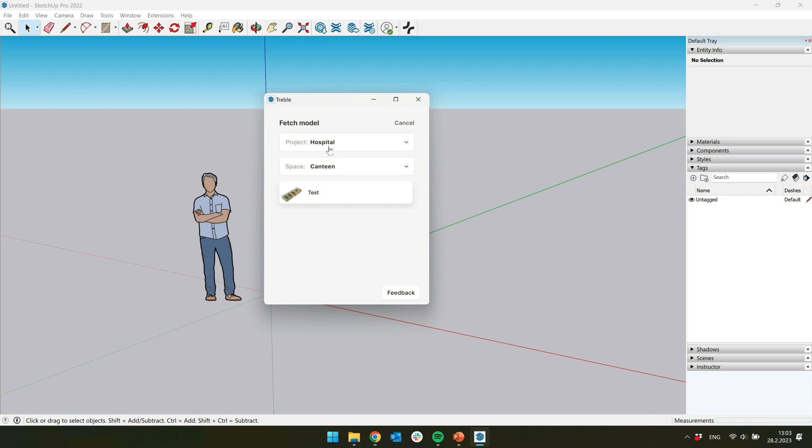Takes a second to start SketchUp. Okay, I'll open an empty model like this. I'll open the Treble plugin here, and I can fetch the model I was playing around with from the cloud, so I don't need to keep any files locally. This was part of the office building project's second floor space—let's fetch the initial design and get it into here. Here is my model with all the layers I had previously defined.

Now let's add a couple of layers—one we call wall absorber, and one we call partitions. Let's start by drawing the wall absorber here, something like this, being sure to put it on the right layer. And then let's draw in some partitions.

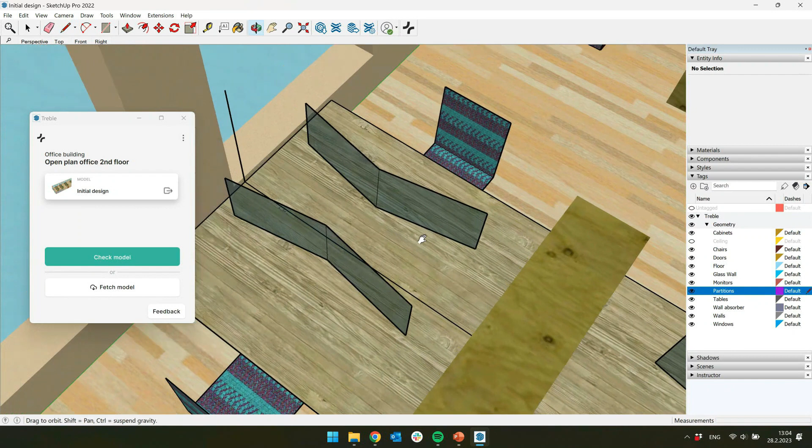Now you'll have to live with my mediocre SketchUp drawing skills, but let's put a partition here. Let's say it's 80 centimeters high, something like that. Maybe it goes across here—here's the midpoint, right, midpoint. There we go, draw it up here, 0.8, and across. Okay, now we have our first partition.

It's on the partition layer. I'm now going to copy that and paste it to the other desks as well, something like this. There we go. And the final one. Okay.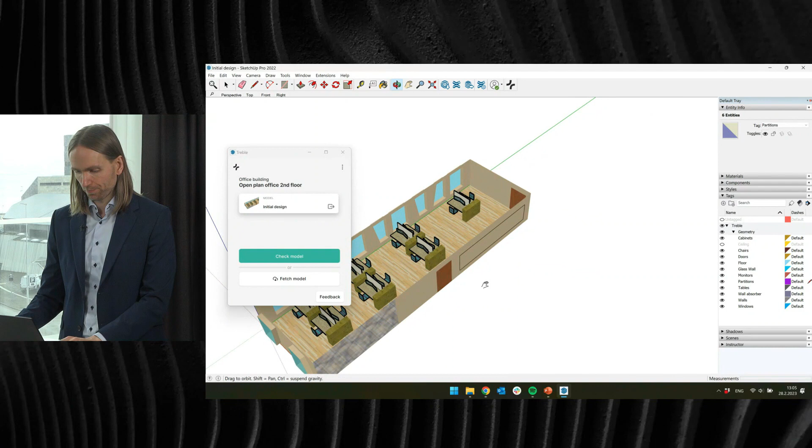These are the changes I wanted to make. Now I can just check that the model is suitable for simulation—it is. Then I can upload it to the Treble platform, and let's say here, now with partitions and wall absorber.

Upload this thing, it goes to the cloud, and I can pop it open here, and it takes me directly to the platform. Here I have not run a simulation on this particular revision of this geometry, so it's telling me I need to create my first simulation.

I can do that, but luckily I can pull the settings of my previous simulation, so I don't have to set everything up again. Let's just say even further improved, call it this simulation.

All of the settings that I had from before are set and good to go, except for the surfaces that were modified when I was modifying the geometry. For example, the tables were a bit modified because I was putting the partitions on, so I'll have to reassign the material there. Walls as well—most surfaces are untouched, but a couple are, so I'll just reassign the whole layer with this gypsum board material. Cabinets, what did we put? Plywood paneling.

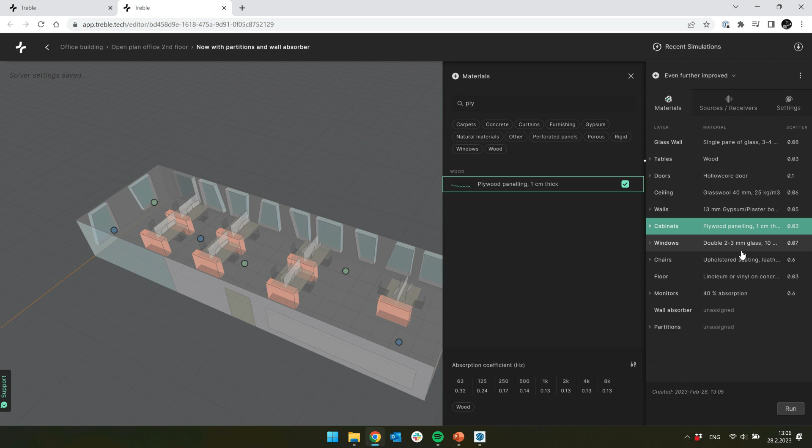And then the wall absorber, of course, let's put rock wool, 50 millimeter, maybe with a glass fiber surface as well. And the partitions, how about if we put that to be 25 millimeter rock wool with glass fiber surface. Also need to double check that my scattering coefficients are correct—the ones that were affected will be reset, so something like this, and this one here.

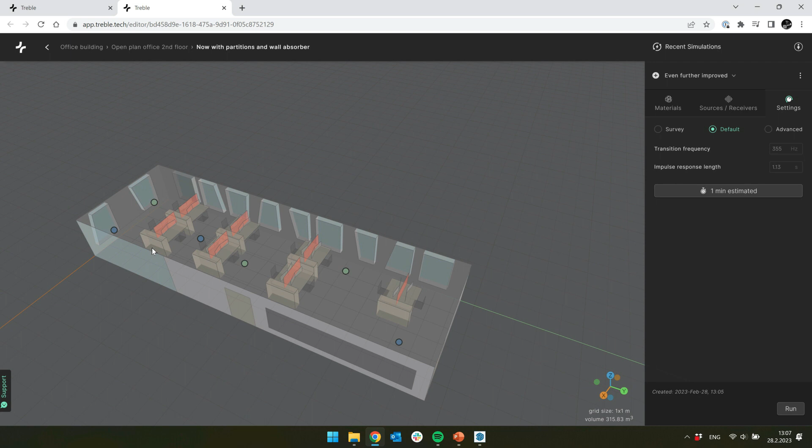That's it. Now I'm ready to rerun my simulation with this modified geometry. Because I haven't run a simulation on this before, I need to estimate the runtime here. Or I could just hit the run button and it would start and then just estimate and run it, but I'll show you the estimate function. What's happening under the hood is that a volumetric mesh is being generated of the space, the finite element mesh used by the wave-based simulation. It's saying it's taking around a minute.

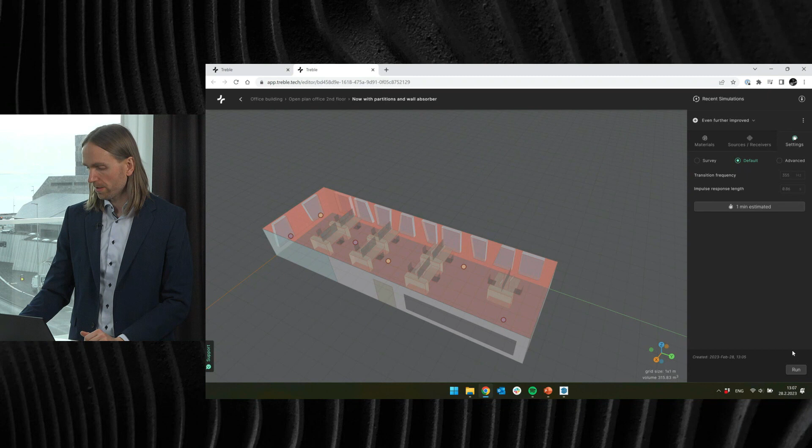Actually, I forgot one thing I wanted to do to improve the acoustics. In addition to the wall absorber and the partitions, let's put an even better absorber in the ceiling. How about a suspended ceiling, maybe something like this one here—suspended 200 millimeters, 70 kilos per cubic meter, a high performing acoustic ceiling. And then it's predicting I need to simulate a 0.86 impulse response length, so this should be pretty good.

Start this, and now we will wait for 1 minute while this simulation runs, and I think we'll just edit the video to come back in 30 seconds or so.

Okay, now we're coming back just 30 seconds later, and the simulation is just about to wrap up. There will also be a little bit of post-processing of the data before we can start looking at results. Let's just see that end here.

What I'm going to do is compare the simulation results from the 3 simulations I've run—2 of which were from the previous revision of the geometry, and 1 from this one—look at some graphs and numbers, and then auralize that, and then the demo is over.

Processing, processing, processing. Here it's done. Okay, let's open the result view and compare those 3 material configurations that we were testing.

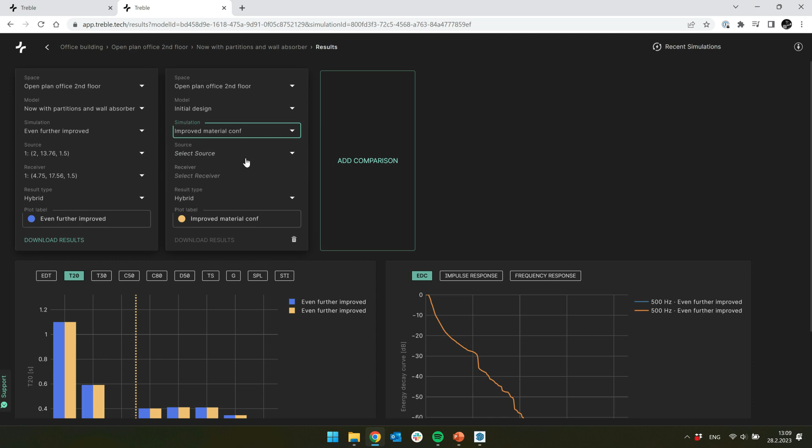The other 2 are from the other geometry revision. One we called the improved material configuration, and the other one we called the initial material configuration. Indeed, as expected, the reverberation time has been reduced quite a lot between the okay configuration and the good configuration, and much improved compared to what we had originally. We see that in other acoustic parameters too—the acoustic performance of the space has been improved.

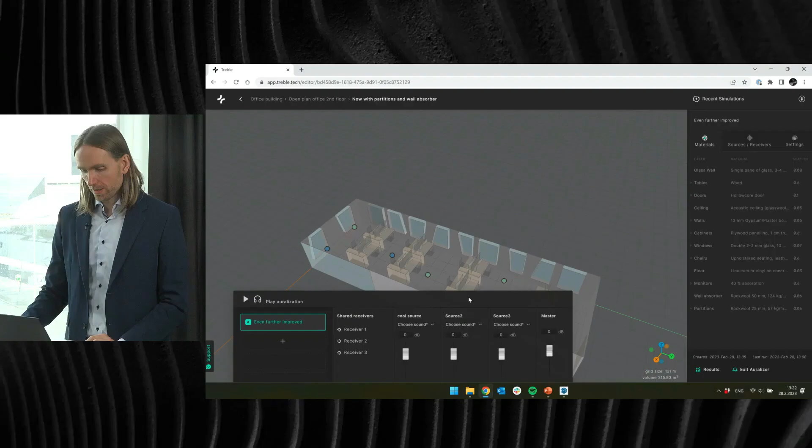Okay, let's now go into the auralizer and listen to the space. As before, I can compare on the fly different receiver positions. I can move around the head, and I can compare different simulations, even from different models or different revisions of the geometry that I was running, as here.

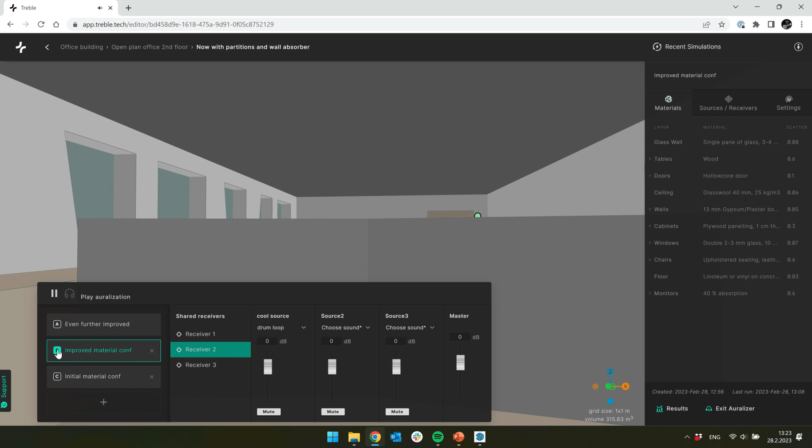Let's pull in all 3 that we have run, and let's first listen to the anechoic sound, the drum loop. We get that here, and then I'll jump into the room and play a bit around. We clearly hear that the partition is doing its work, and also that the diffraction around the partition is modeled rather nicely with the timbre change you can hear in the drum sound. We can hear by removing the partition that the sound obviously changes.

With the sort of more realistic office sounds—real quick, what's this one? And classroom sounds as well.

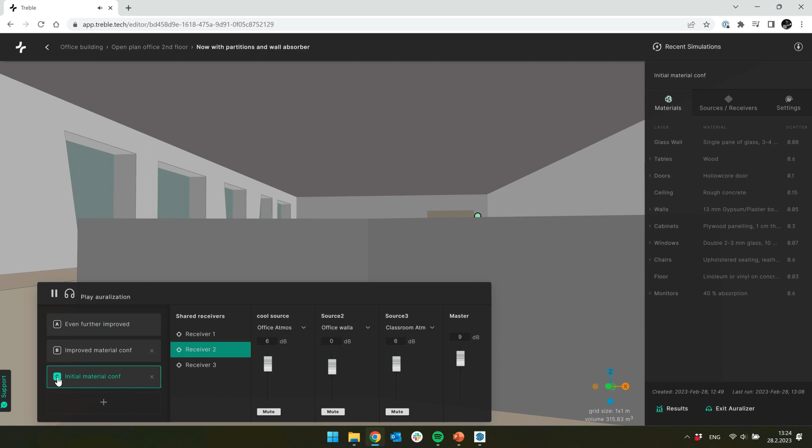Okay, that was the quick demo of the Treble platform. Now let's go back to the slides and wrap this up.

I wanted to talk about two things here at the end: a little bit about the future or the roadmap, what lies ahead for us, and then touch upon pricing and support. Starting with the shorter term roadmap, let's say next 3 to 6 months, and then thinking a little bit longer, 6 to 12 months as well.

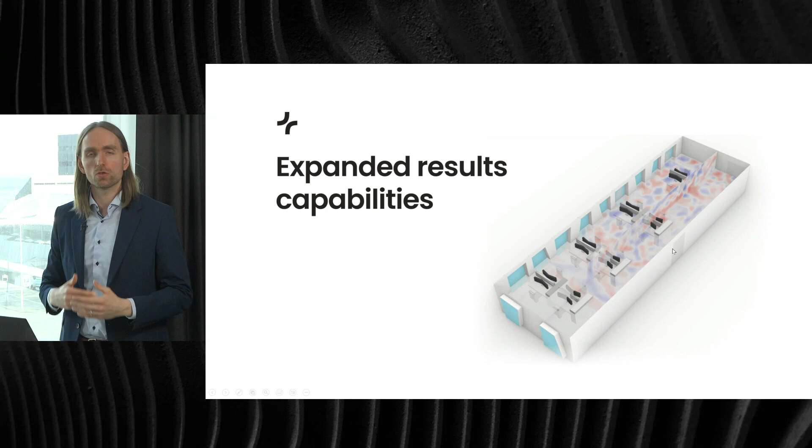On the horizon for us is expanded results capabilities, the ability to generate sound field animations within the tool, so you can really see how the sound is behaving, or create color map results as well. Also advanced post-processing capabilities, like going to extremely high order ambisonics. We're going up to order 16 now without problems, as an example.

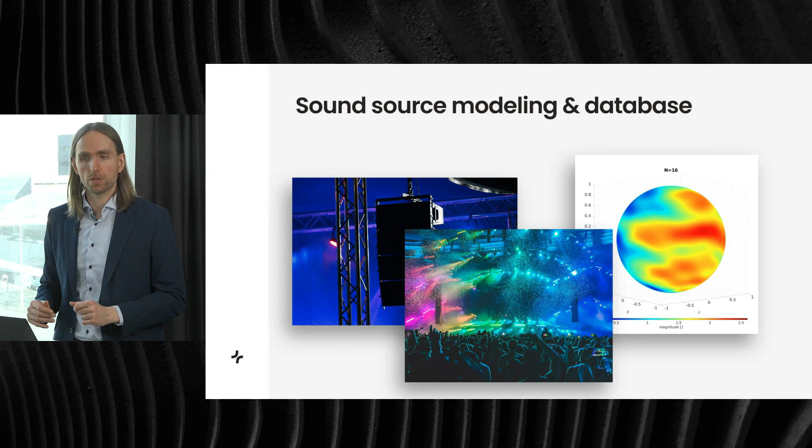Sound source modeling - we want to add lots of sound sources to our database, but also add the ability for users to input their own sound sources or arbitrary directivity patterns and then simulate them in the room, to enable, for example, pro audio simulations or device-room interaction simulation, including very precise low frequency simulations.

A material generator - this is a tool that enables you to specify your own buildup of a material. Let's say 50 millimeters air cavity, then this type of porous absorber, and then 2 layers of gypsum board, or whatever. We have an algorithm that computes the impedance of this type of buildup, so you can model your unique materials in a more precise way than what's been previously possible.

All kinds of collaboration features. An example is that you can create an auralization which you can then create a shareable link to, which you can share with your collaborators, for example your architect collaborator. So then you can set up 3 different design options and ship them off in an auralization that can be listened to by anyone. Also collaboration within organizations and across organizations.

A Rhino integration is coming soon. I would say that all of these things that I just mentioned, we sort of have them working already, but we just need to tweak them and get them nicely into the front end and the user interfaces and so on.

If we look a bit further into the future, this is the overview we see of the Treble platform. The thing we've been talking about today is this acoustic simulation suite, and we will certainly continue developing that further, but we will also add additional modules to the platform, namely a synthetic data generator, a Treble API, and a connection to metaverse platforms.

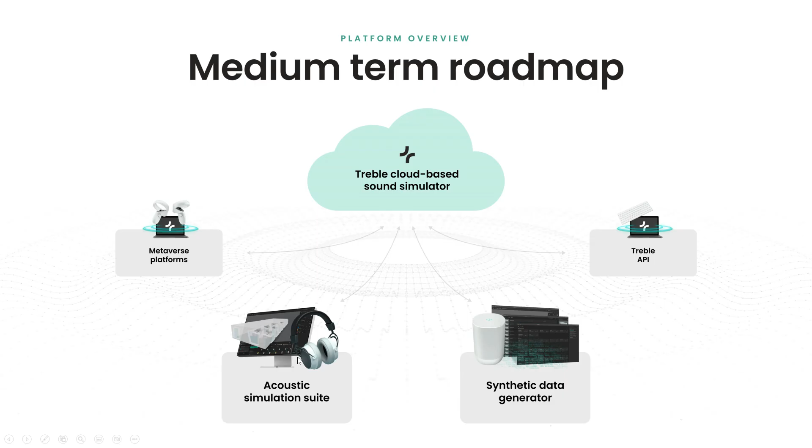First, to tell you a little bit about the 6 to 12 month horizon for this: one major thing we're working on is a Revit integration. Revit is very widely used in the building industry, and we want to connect directly with it, automatically extract geometry from it, and simplify it so that you can run an acoustic simulation on it effectively.

Synthetic data generation is an extremely exciting field. Audio machine learning algorithms require high quality data to be trained. This can be echo cancellation, beamforming, noise suppression, speech recognition, etc. We have the ability with this advanced cloud-based simulation technology to run hundreds of thousands of high fidelity simulations and generate synthetic audio scenes which can be used to train these types of algorithms.

We're already offering this as a service, working with some of the large tech companies to provide this kind of training data for their development efforts. But with time, we want to deliver this more as a product so that people can set up these audio data set generations themselves.

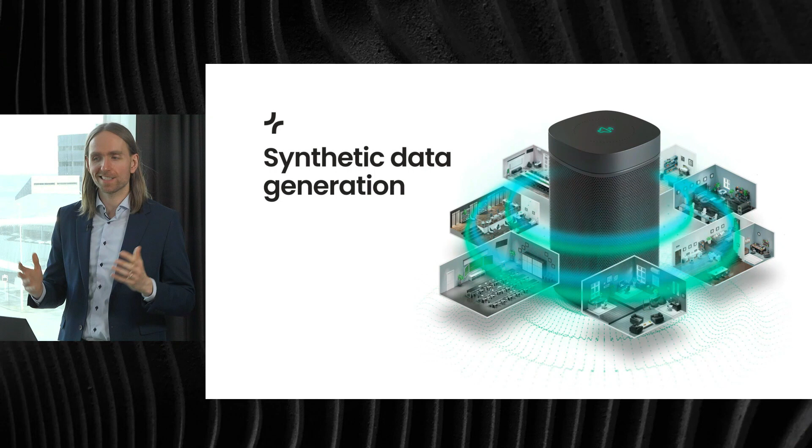An API product is also in the pipeline, which enables people to integrate our simulation technology into their own solutions or automated workflows and so on. And then a connection to metaverse platforms or gaming engines to enable even more immersive auralizations and six degrees of freedom auralizations, meaning you can move around the space freely and so on.

So that was it for the roadmap. Last slide here, just about pricing, licensing, and support. We offer the platform using a subscription licensing model, meaning people subscribe and pay a monthly fee for access. This ensures people always have the latest version up to date and get access to world-class support all the time.

Anyone who's interested in trying the platform can do so for free for 30 days. So please reach out to us if you're interested in giving it a spin.

And then we have sort of 3 license types here. A basic license, which is a single user license, a professional license, which is also a single user license, but with a bit more cloud computing capabilities, let's say. And then an enterprise license, which is for organizations with 2 or more users. And we suspect that most people will go into the enterprise category here.

And then what we do is we give a quote based on how many seats, how many users, and what the expected usage is. We're planning to price this in a price range which is competitive or even cheaper than existing solutions in this space we're working in.